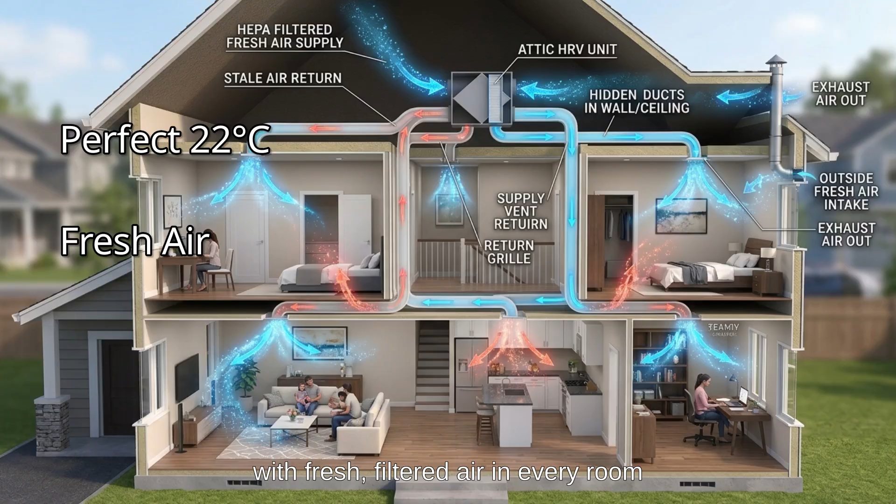Why this matters. What if I told you that you could live in a house that stays at a perfect 22 degrees Celsius all year round, with fresh, filtered air in every room, and your heating bill was practically zero? This isn't science fiction. This is the passive house standard. But here is the problem.

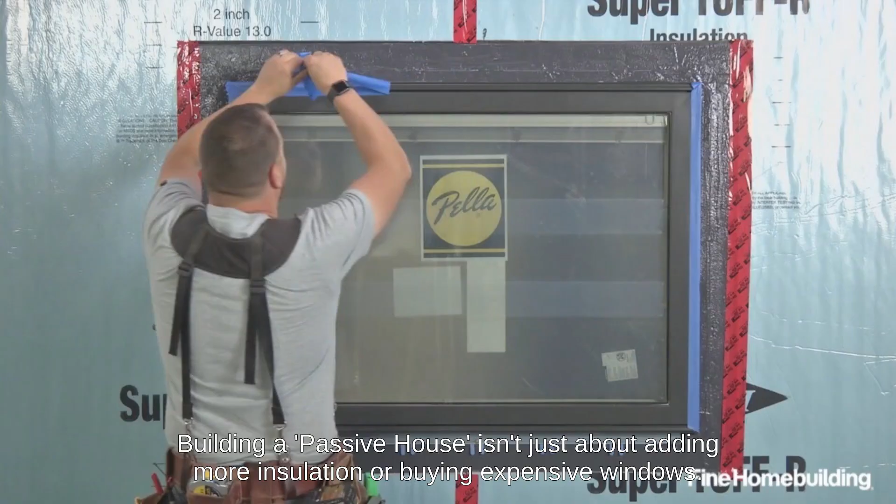Building a passive house isn't just about adding more insulation or buying expensive windows. It is a precise, scientific method. And if you want to get it right, you have to go to the source. The Passive House Institute in Darmstadt, Germany. Today, we are doing a complete walkthrough of the official PHI platform.

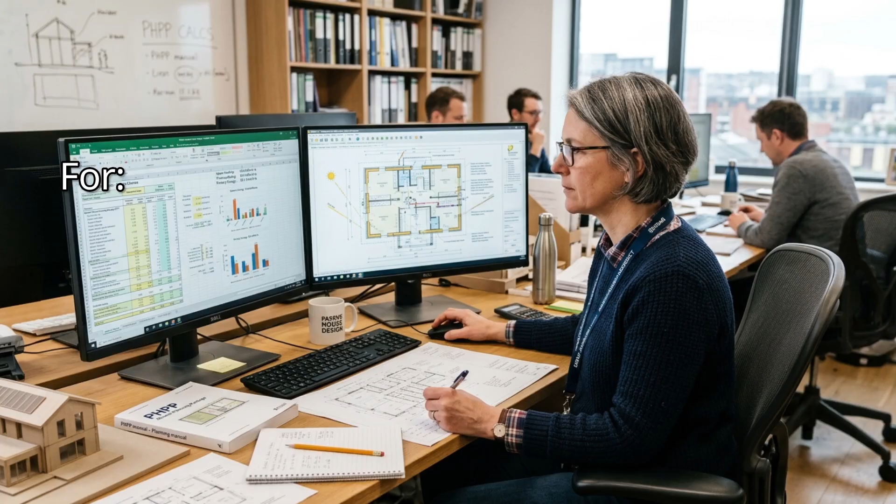Whether you are an architect trying to master the PHPP software, a developer looking for certified components, or a homeowner who wants to understand the non-negotiable criteria for certification, this video is your roadmap. We are going to look at the math, the tools, and the data that make ultra-low energy buildings a reality.

Navigating the home of efficiency. First things first. When you land on the Passive House Institute homepage, you'll notice it's available in both German and English. For this deep dive, we're using the English version. The PHI is an independent research institute, and for over 3 decades, they have been the global leaders in highly energy-efficient construction. Their website is a goldmine, but it can be overwhelming.

We're going to focus on the 3 pillars that actually matter for your project. 1. Certification, the law of passive house. 2. The planner, the brain of your design. 3. Components, the verified parts you need to build it.

The law of passive house. Let's start with section 1, certification. Why get certified? Because it ensures that your building actually performs as designed. No performance gap. Under this menu, you'll find the criteria link.

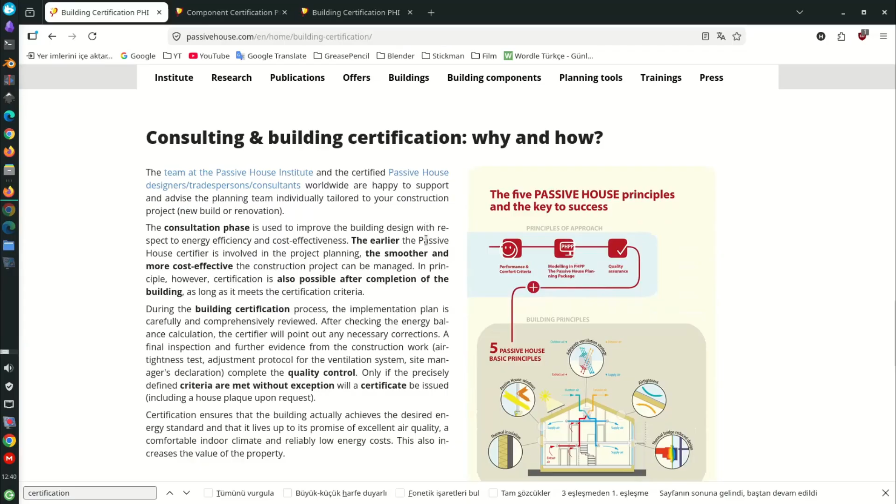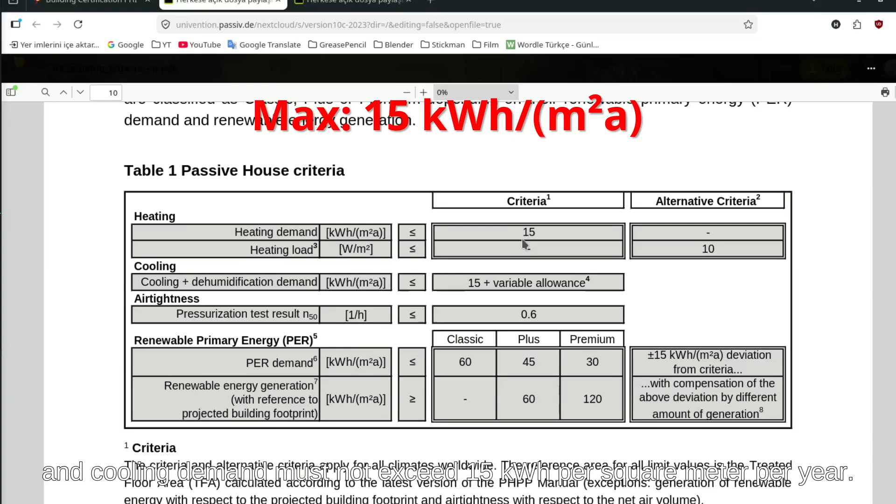These are the non-negotiables. If you are looking for a starting point for your project, these 4 numbers are your North Star. Number 1, heating and cooling demand. Your building-specific space heating and cooling demand must not exceed 15 kilowatt-hours per square meter per year. Compare that to a standard modern house that might use 100 or 150. We are talking about a 90% reduction.

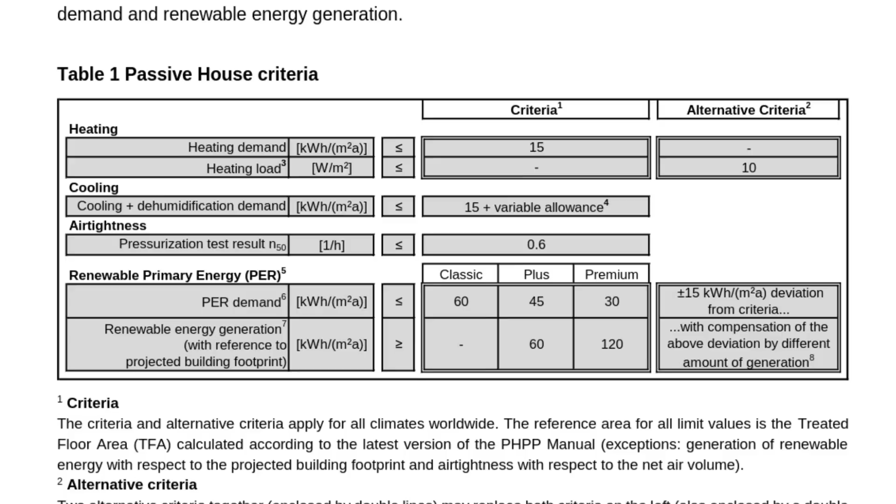Number 2, primary energy renewable. This isn't just about what the house uses, it's about the total energy needed to run the house, including appliances and hot water. It must be less than or equal to 60 kilowatt-hours per square meter. The goal is to move toward a completely renewable energy supply.

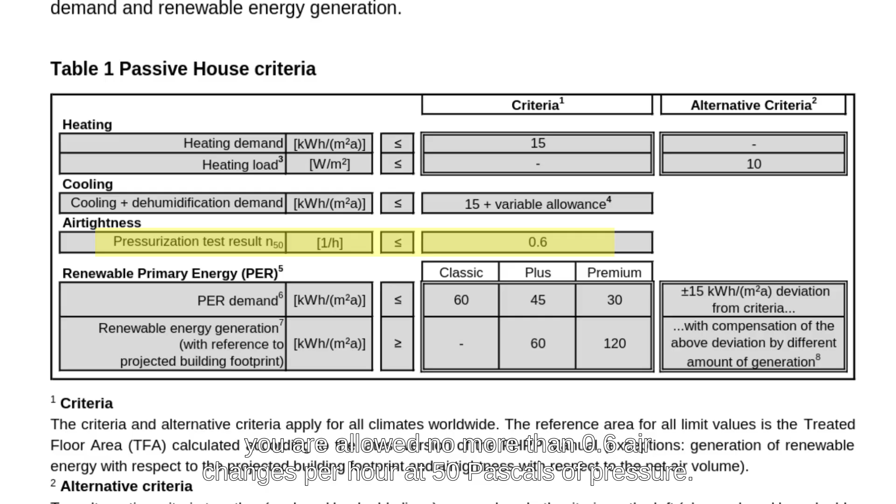Number 3, airtightness. This is where most builders fail. In a passive house, you are allowed no more than 0.6 air changes per hour at 50 pascals of pressure. This is tested with a blower door test. If you have a single leak in your building envelope, you won't hit this number.

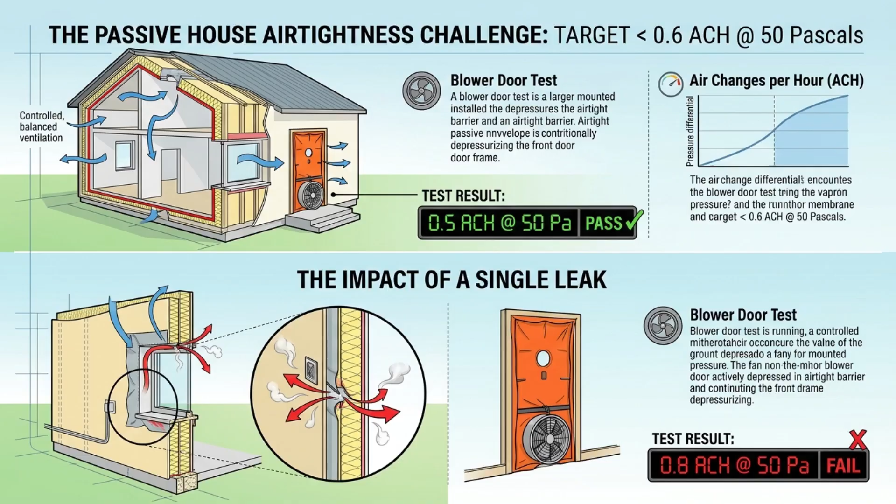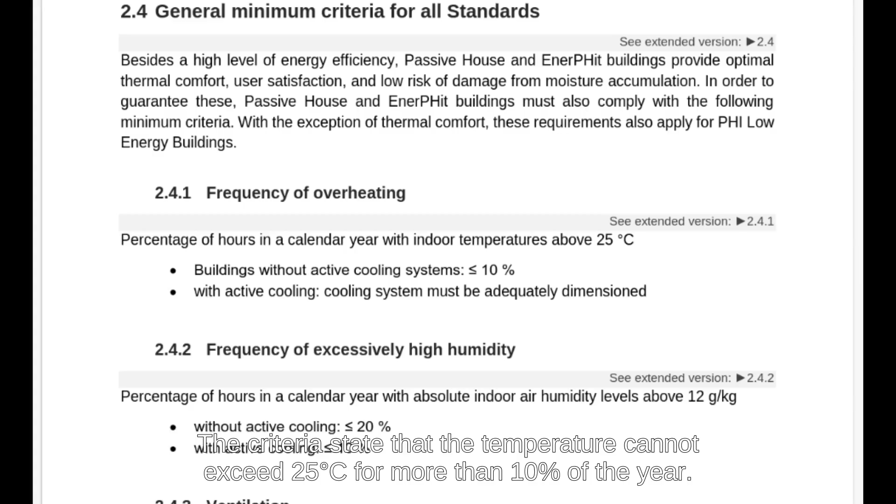Number 4, thermal comfort. Energy efficiency is useless if the house is a greenhouse in the summer. The criteria state that the temperature cannot exceed 25 degrees Celsius for more than 10% of the year. These criteria are the absolute foundation. If you aren't aiming for these, you aren't building a passive house.

The brain of the operation. Now, how do you actually calculate these numbers? You don't use a standard heat loss calculator. You use the Passive House Planning Package, or PHPP. Now, full disclosure, PHPP is a professional, Excel-based software that you have to purchase. But don't let the Excel part fool you. It is one of the most accurate energy modeling tools in existence.

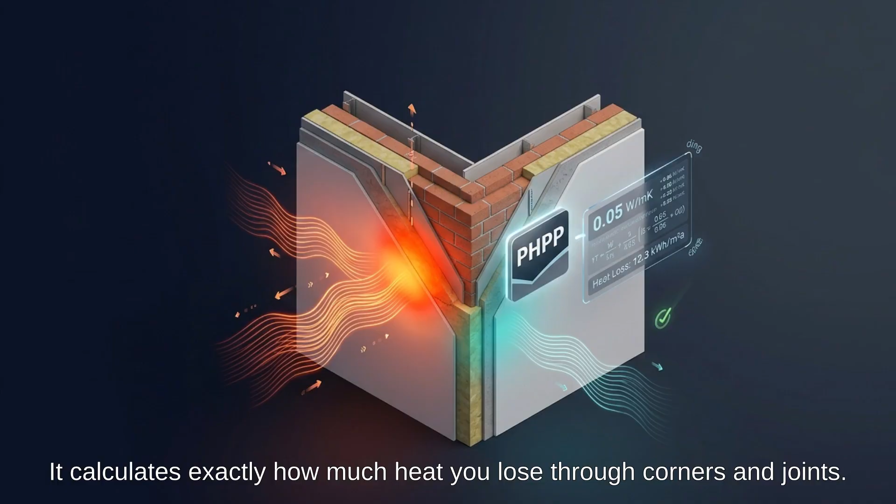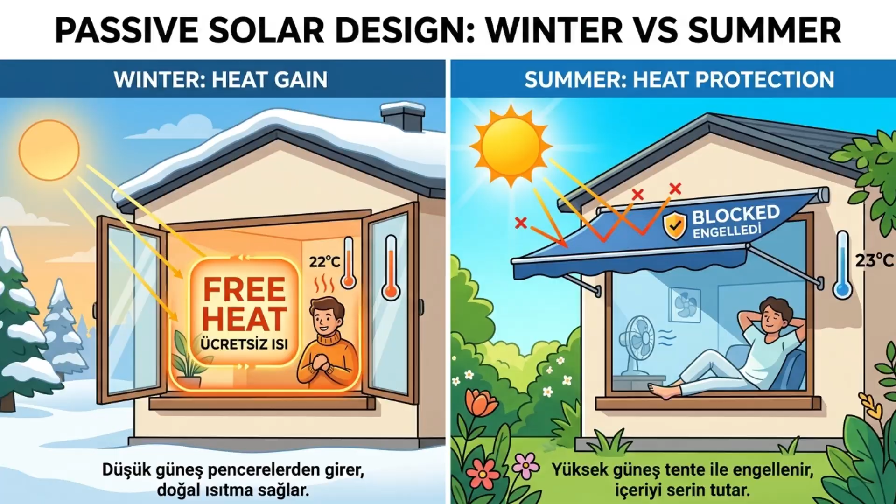Why is it indispensable for architects and energy consultants? Thermal bridge analysis. It calculates exactly how much heat you lose through corners and joints. Solar gains. It calculates how much free heat you get from your windows in winter versus how much shading you need in summer. Summer comfort. It predicts overheating before you even lay the first brick.

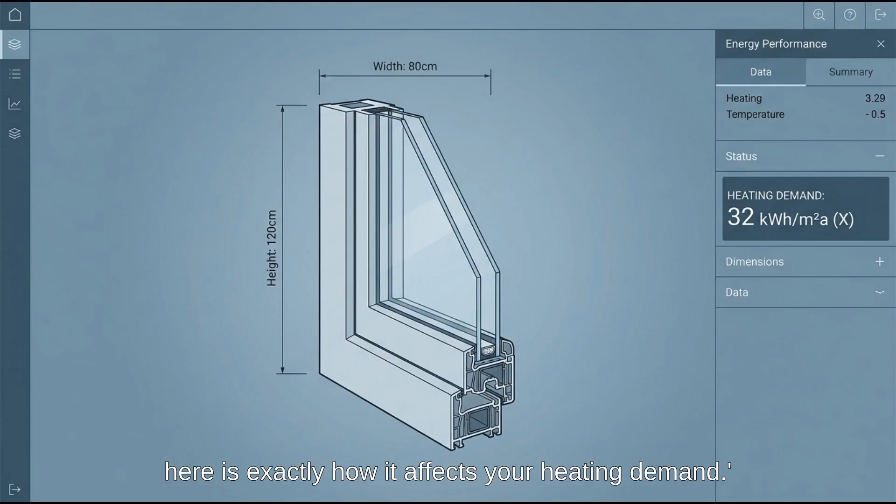On the website, under the PHPP section, you can find information such as the current version of PHPP or the features of the new update. It's not just an energy math tool, it's a design tool. It tells you, if you make this window 10 centimeters wider, here is exactly how it affects your heating demand. It removes the guesswork.

Where theory meets reality. This is the most interactive part of the site. The component database. Think of this as the Amazon of high-performance building parts, but everything here is verified by PHI. Let's run through 3 real-world scenarios to show you how to use this. Scenario 1, high-performance windows. Let's say you are building in Central Europe or a warm temperate zone like Turkey. We go to the Windows category.

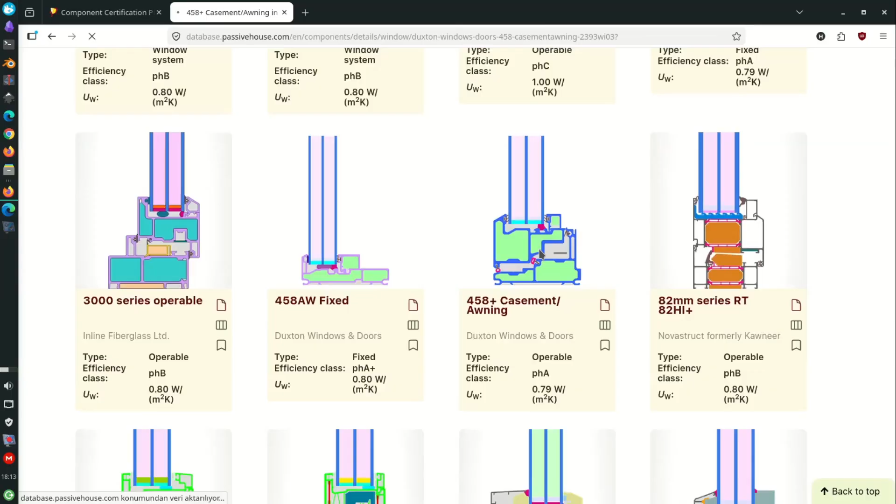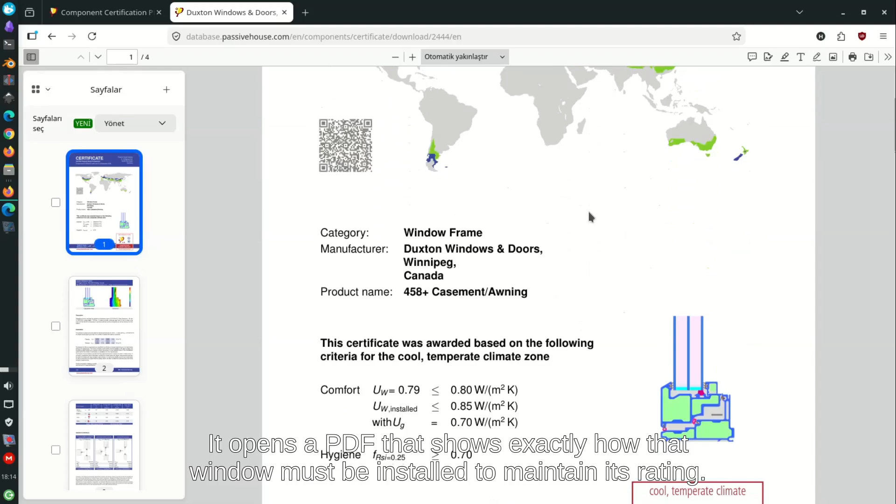We are looking for a Uw value of less than or equal to 0.80 W. The database lists hundreds of certified frames. But here is the pro tip, always click the certificate button. It opens a PDF that shows exactly how that window must be installed to maintain its rating.

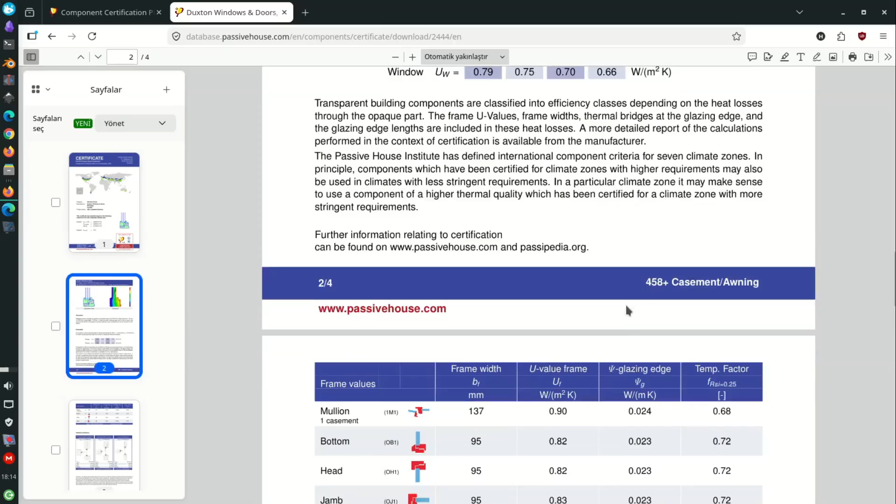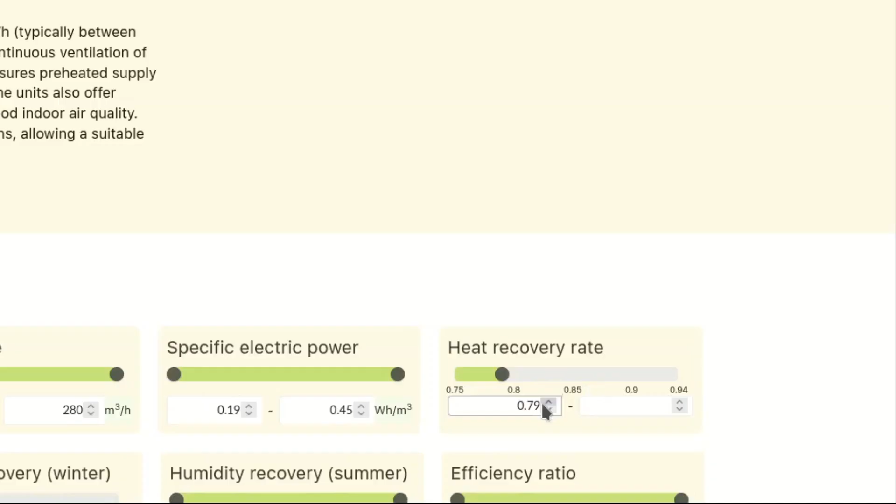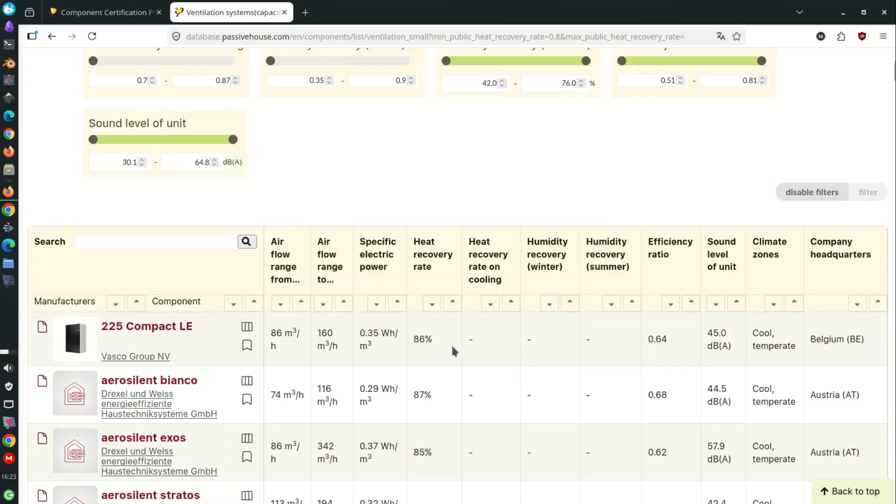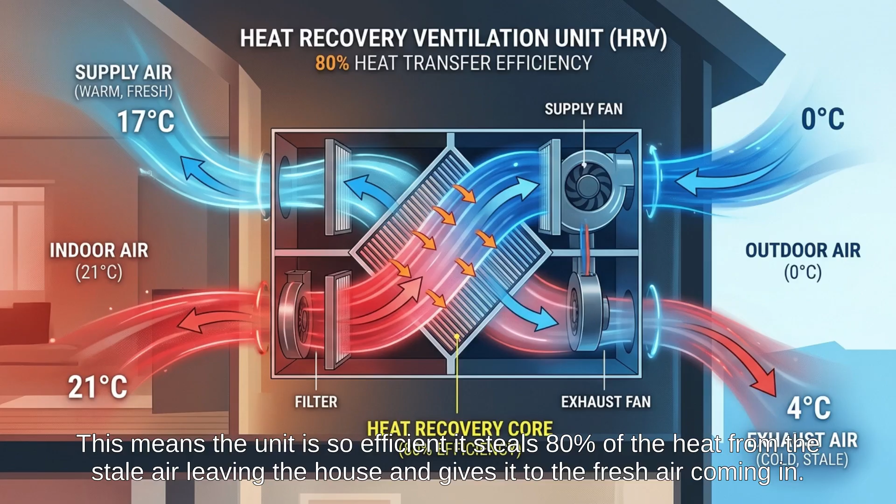Scenario 2, ventilation units. Passive houses need a constant supply of fresh air. We select ventilation unit. We filter for a heat recovery rate of 80%. This means the unit is so efficient it steals 80% of the heat from the stale air leaving the house and gives it to the fresh air coming in.

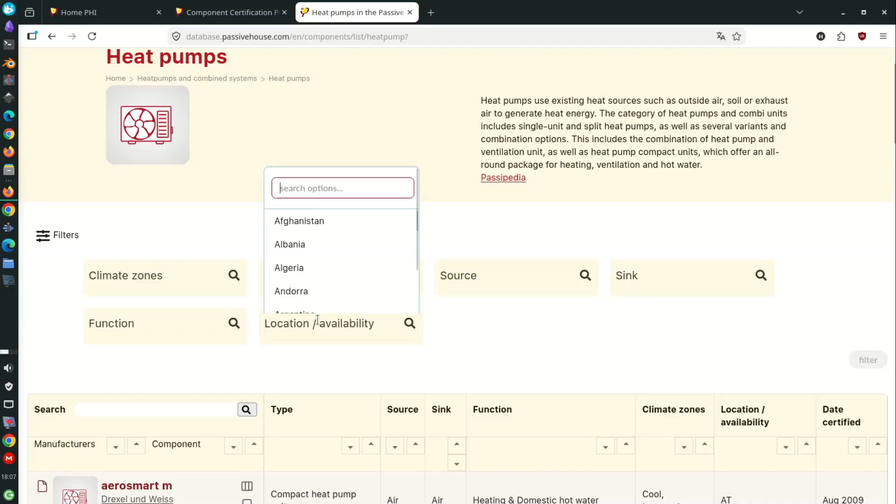Scenario 3, heat pumps. For those in warmer climates, we can filter for heat pumps optimized for high efficiency even when it's humid. Crucial insight. Just because a product is in this database does not mean your house is automatically a passive house. You must take the specific values from that product certificate and enter them into your PHPP software. The component is the ingredient, PHPP is the recipe.

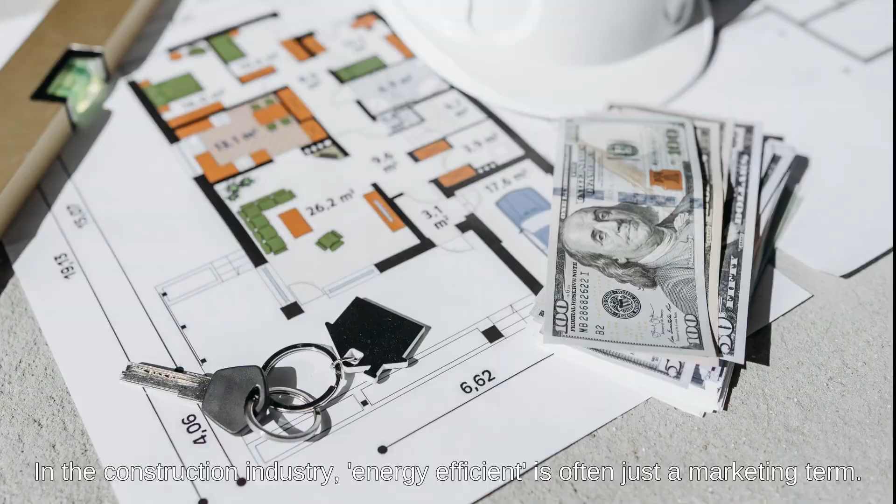Part 6, Transparency and Truth. Why does the Passive House Institute go to all this trouble? Why maintain a massive database and a complex software? Because of transparency. In the construction industry, energy efficient is often just a marketing term. But certified passive house is a scientific fact. When you use these tools, you aren't guessing. You are using data that has been tested for over 30 years.

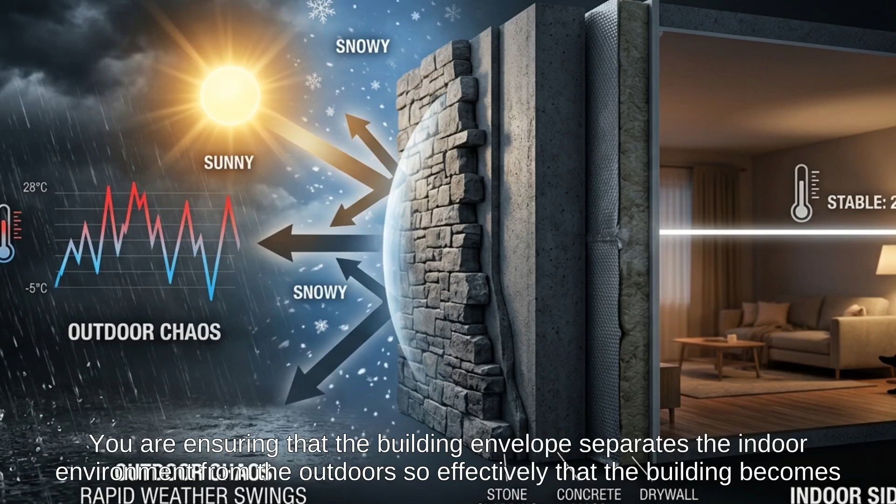You are ensuring that the building envelope separates the indoor environment from the outdoors so effectively that the building becomes thermally heavy, meaning it holds its temperature regardless of the weather outside. Part 7, your next step. The Passive House Institute website is the most detailed, transparent resource for anyone serious about the future of building. It's not just for the green enthusiasts, it's for anyone who wants to build something that lasts and provides a superior quality of life. So, here is your homework.

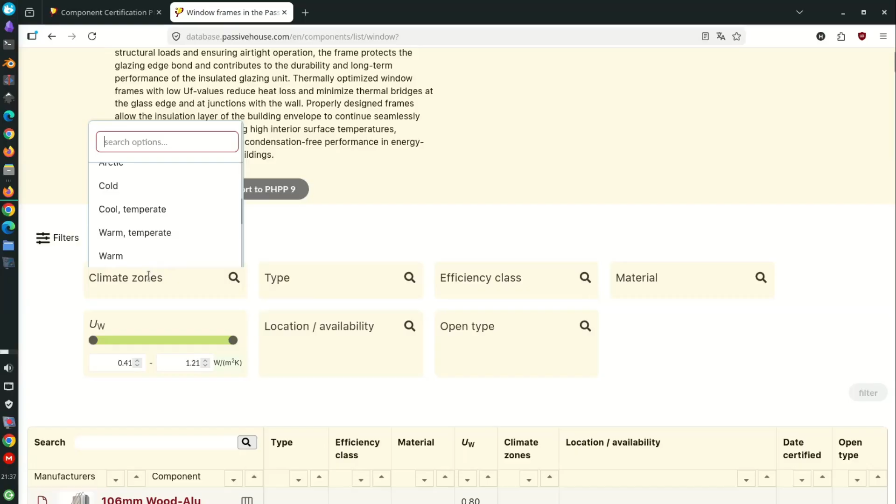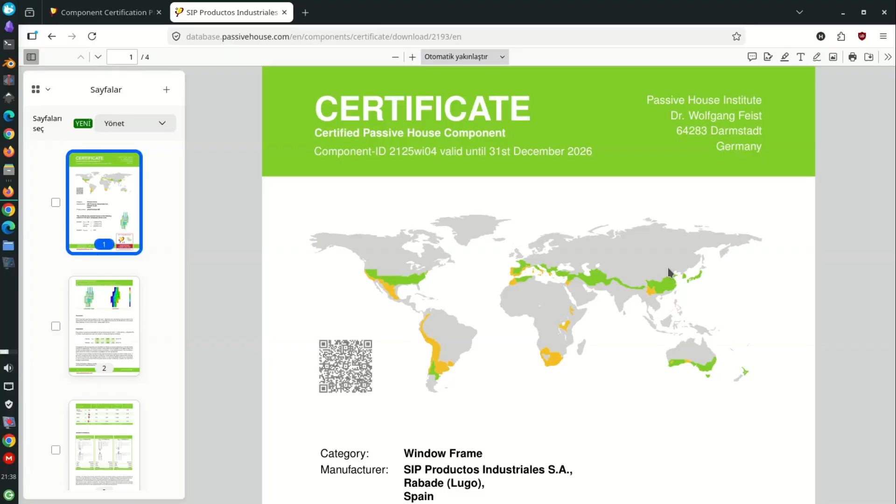Head over to database.passivehouse.com. Find a window or a ventilation unit that is certified for your specific climate. Open the certificate. Look at the numbers. Start practicing with the data.